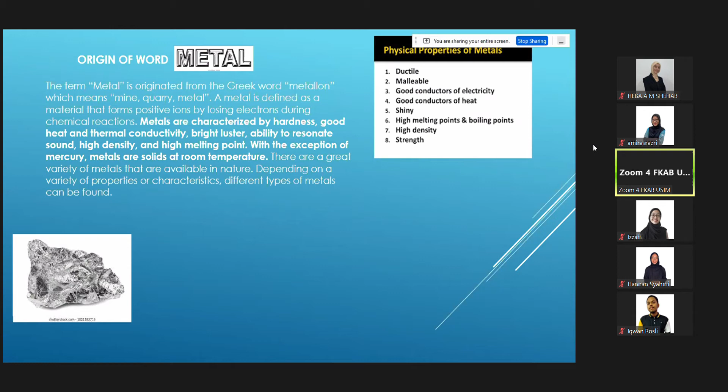Strength depends on the nature of the steel. If it is low carbon, the mild steel we used to use, it is very strong. Medium carbon steel is even stronger, and high carbon steel is the strongest. I'll show you some examples later of what low carbon, medium carbon, and high carbon steel mean.

Of course, it's the product of going through a process of heating and through the furnace, and they come up with so many products that can be used in our building industry.

You can build a simple structure like this using the universal beam and column, as they call it. I'll explain later what is meant by universal beam and column. We can turn this into a simple building built of metal, and it's very fast construction, with all the advantages over concrete.

All right, okay, let's see a bit of history. I mentioned history, maybe it's a bit too far back. Mesolithic, basically during the Stone Age.

Hunting and gathering communities moved across land near the British Isles, forming stone tools. Small trimmed blades, or microliths, were mounted in different combinations to make a variety of tools. Basically in the early days of the Stone Age, they used stone to make it sharp so it could become a tool for cutting.

6000 BC, gold was also found during the Stone Age. Men learned to fashion it into gold jewelry, like all these Egyptian kings.

The popularity of gold is largely due to its scarcity, value, and mankind's fascination with the metal. See the face of Tutankhamen here, all built of gold.

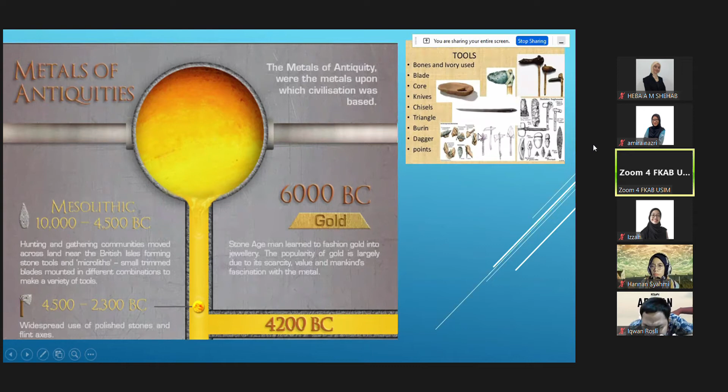For gold, it was first found in gold nuggets, like what you see below, discovered around 6000 BC. People first used gold for money and often traded it with others. So gold was appreciated a long time ago, even mentioned in the Quran as I told you.

And then in 4000 BC, silver. Silver, basically like a silver spoon, is hard, but it was widely used throughout history as a basis for monetary systems. They used it as money, as coins, and it played a central role in the currency of the Roman and Chinese empires.

Then at 3500 BC, you got copper. Copper is 4200 BC. Copper's use in antiquity is more significant than gold, as the first tools, implements and weapons were made from copper. These are raw materials, and we'll talk later about some alloy materials after.

You got lead. Lead also, we don't use so much in building, but we're talking about back 9,000 years ago - the oldest known artifact of lead is a statue found in the Temple of Osiris. This is something about history. The wheel is used in Central Europe. Wheel, lead, and the lead wheel.

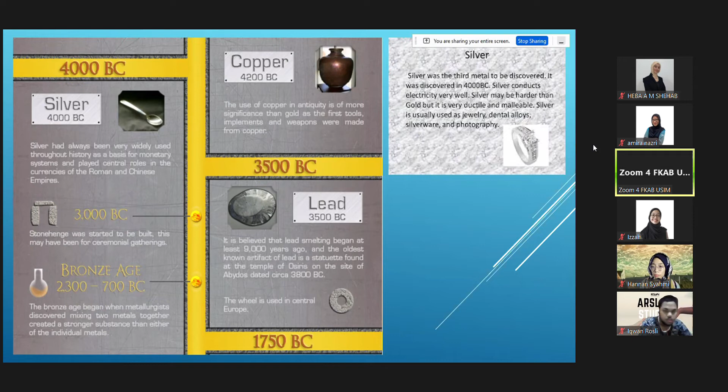Why was bronze important in ancient times? Bronze marked the first time humans started to work with metal. Bronze tools and weapons replaced earlier stone versions. Humans made many technological advances during the Bronze Age, including the first writing system and the invention of the wheel. It's a bit of history - I wasn't even taught about this kind of history. Maybe just for the sake of this class, I learned something here too.

So coming to 1500 BC, they got iron smelted. Before that, there's tin. Tin is found in 1750 BC, first smelted in combination with copper. Is tin an alloy too? No - bronze, brass, and lead are alloys. Tin is natural. Smelted with copper around 3500 BC, it produced bronze. Yes, bronze is an alloy, made of tin and copper.

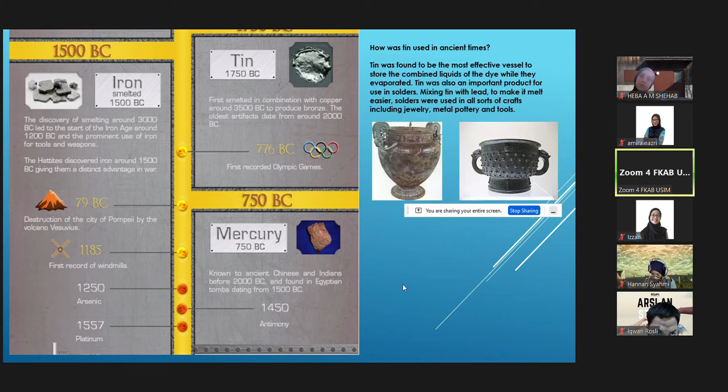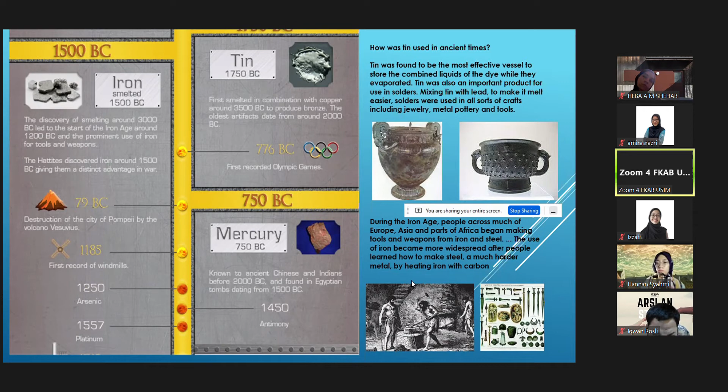During the Iron Age, people across much of Europe, Asia, and part of Africa began making tools and weapons from iron and steel. The use of iron became more widespread after people learned how to make steel, a much harder metal, by heating iron with carbon. That's the basic content of steel - basically iron and carbon.

And then come to 1700, the invention of the steam engine. They found cobalt, antimony, kinds of material I never heard of before because I'm not a metallurgist. Then they discovered metals in the 18th century, like bismuth.

Bismuth's main uses nowadays are pharmaceutical, atomic fire alarms and sprinkler systems, solders and other alloys, pigment or cosmetics, glass and ceramics, and also as a catalyst in rubber production. That is the form of bismuth.

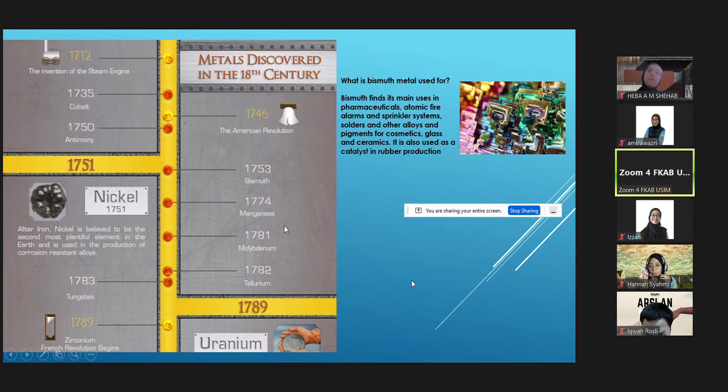Of course, manganese, molybdenum, titanium, all sorts of names. Tungsten is another material we use in our building industry, currently used as electrodes, heating elements, field emitters, and as a filament in light bulbs and cathode ray tubes.

Tungsten is also commonly used in heavy metal alloys such as high speed steel. Actually, high carbon steel is the same meaning. High carbon means very tough, very hard, used as drilling tools or similar things. We'll show you after that.

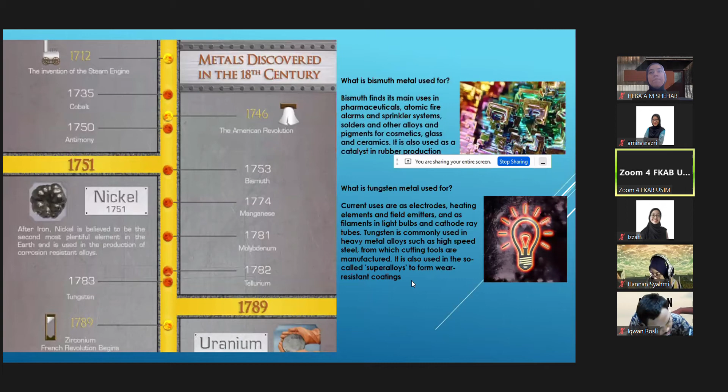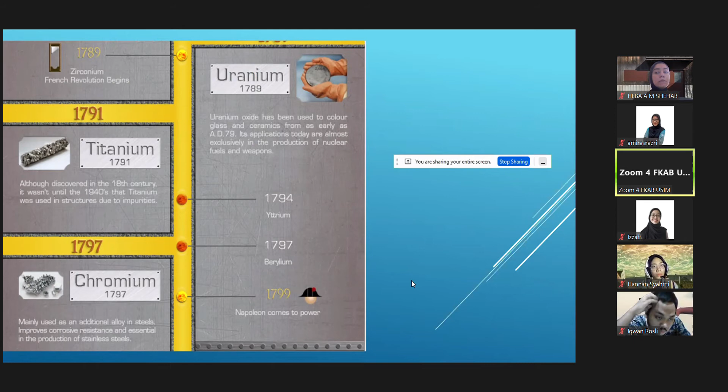Titanium, yes, titanium was found in 1791. They discovered titanium also in the 18th century. It wasn't until 1940 that titanium was used in structures, due to impurity because of the density.

Titanium metal is very durable for engineering applications because this metal is corrosion resistant, like stainless steel. Also, this metal is very strong, very light - it is 40% lighter than steel, but has the strength of high strength steel.

So titanium finds application in things like aerospace and building facades. Even nowadays in Europe and the US, they're using this as building facade, together with aluminium and stainless steel for building facade. Most aerospace parts are also using titanium.

I remember one of my architect heroes when I was doing my MPhil program in Sheffield - Ian Ritchie. He is very modernist, yet he loved arts. He looked for high technology. He said when he went to see an aerospace show, he didn't look at the plane flying, but at the detail of titanium being fixed to the plane. Even the titanium from the tire - the parts of titanium - it goes up to the building. So he had to see this kind of thing. Ian Ritchie.

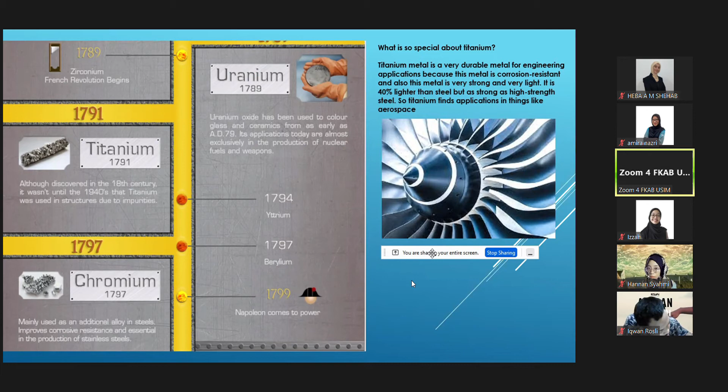Then you've got titanium. This is another building facade, by Frank Gehry - I think this is the Disney Museum. Even the Guggenheim Museum in Bilbao also uses the same material. It's light and of course it lasts, and it's expensive, of course, very expensive.

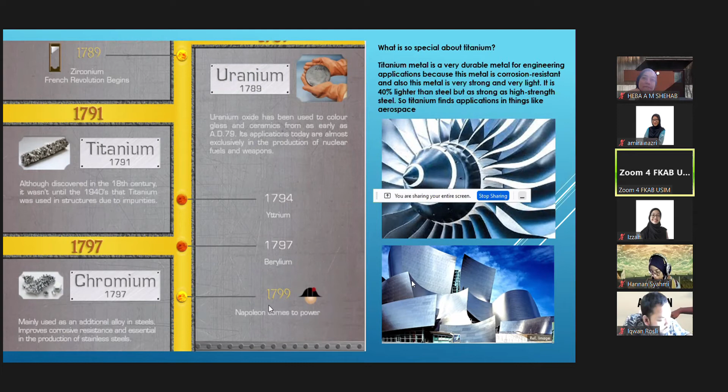And then we have silicon. Interesting, right? Silicon, the element, is a major constituent in ceramics and bricks. Being a semiconductor, the element is put into use for making transistors. Silicon is widely used in computer chips and solar cells - yes, it is a vital component of Portland cement.

Silicon is also used in the production of brick, production of fire brick. We never see this kind of thing here in Malaysia - I don't think so, we have this. Silicon is quite expensive. At the same time, silicon is famous for sealant, as a sealant, you know.

And this is what we call sealant. They even have structural silicon where they seal and join glass together, for a high glass panel, maybe 6 meters and above. They use this - they call it structural silicon. This is very, very strong.

Most of these wall panels, like aluminium composite panels and some stainless steel panels - sometimes for the external wall, they also use silicon to seal all the joints.

Aluminium at the same time is another very famous material for building construction, but not for structure, more for finishes. Even some structures like railings can be made from it. So is aluminum a metal? Yes. Aluminum is a silvery white, lightweight metal. It's soft and malleable, soft and can be shaped. Aluminum is used in a huge variety of products, including cans, foils, kitchen utensils, window frames, aeroplane parts, and so on.

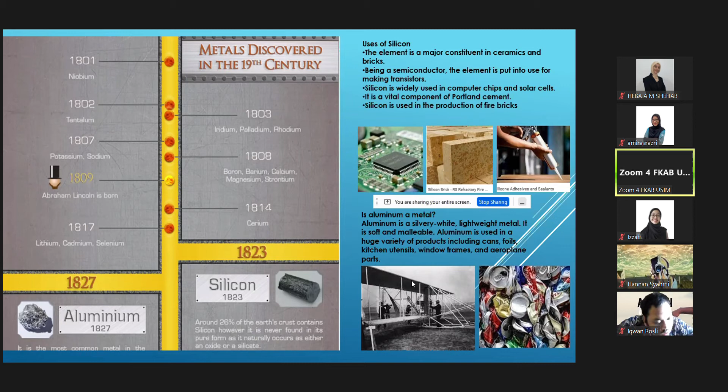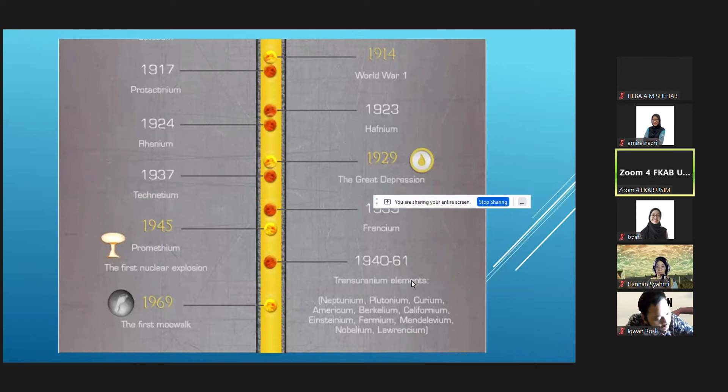Okay, now let's go into the real understanding of metals. Basically, there are two main groups of metal, you can categorize into two main groups. One they call ferrous, the other non-ferrous. I'll tell you what you mean by ferrous and non-ferrous afterward. Ferrous is all metal that consists of iron. They got split into two: pure ferrous metal like iron, that's pure, and then ferrous alloy.

That is steel, which is combined with carbon, cast iron, stainless steel. High-speed steel is the same as steel, it's one of the categories of steel. That is high-carbon steel. Then for the...

non-ferrous, that is without iron metal. Without iron, it's not magnetic. If it is ferrous, I mean that you can respond to magnetic pull. Non-ferrous is without magnetic pull. Basically, they have pure non-ferrous metal and then non-ferrous alloy. Alloy basically is a mixture of two chemicals, two metals.

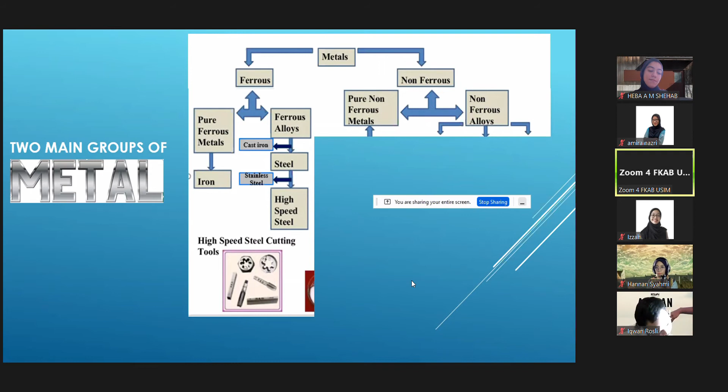Okay, what is under the pure non-ferrous? Basically copper, aluminium, zinc, tin, lead, silver, gold, and mercury. Mercury is actually liquid at room temperature, but it is considered and categorized as a metal. And then the alloy basically is brass. Brass is basically a combination alloy of copper and zinc. Then got bronze, which is a combination of copper and tin, and then solder.

Solder is for joining, for jointing two materials together. It's an alloy of lead and tin. Okay, based on this, we'll go through each of this one, to see how they were formed, and then what are the uses of this material.

Okay, ferrous metal. What do you mean by ferrous metal? Ferrous metals are metals that consist mostly of iron, and a small amount of other element. Ferrous metals are prone to rusting if exposed to moisture. That's one thing. What is the disadvantage of ferrous metal? Like my steel, all the steel are rusty, unless you put some coating, some treatment.

Ferrous metal can also be picked up by magnet, they are attracted by magnet. The rusting and magnetic properties in ferrous metal are both due to the iron, because the iron content is very high, so that causes the corrosion. Typical ferrous metal include mild steel, cast iron, steel, high carbon, high speed, high carbon stainless steel. You can see the rust condition, that's all. This is the characteristic of being attracted by magnetic. Ferrous, non-ferrous is without the attraction of magnetic. Just simple as that.

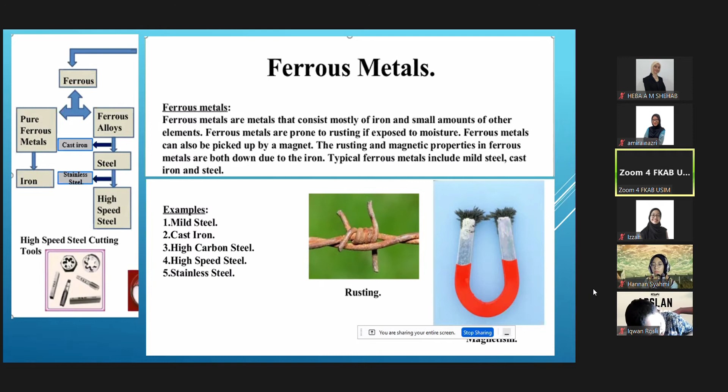Ductile, as mentioned, it can be expanded into wires, and malleable, it can be shaped by hammering.

Okay, where is iron most commonly found? Iron is the most abundant element by mass in the Earth's crust. Then the core of the Earth is thought to be largely composed of iron with nickel and sulfur. The most common iron-containing ore is hematite, but iron is found widely distributed in other materials such as magnetite and also taconite.

Where is iron found? Iron is found everywhere. It's one of the most common metals in the Earth's crust, found almost everywhere, combined with many other elements in the form of ore. Maybe you can try to dig behind your house and find iron, but depending on the nature of the earth, you might have to go in maybe 100 meters.

Let's see what cast iron is. Cast iron is basically a very strong metal when in compression, but it's very brittle - brittle means it can break, rapuh. It consists of about 96% iron and 4% carbon plus other elements.

Cast iron is used, if we look at some of these images, for car brakes, disc car cylinders, metal vices, manhole covers, and machinery bases like drill pillars.

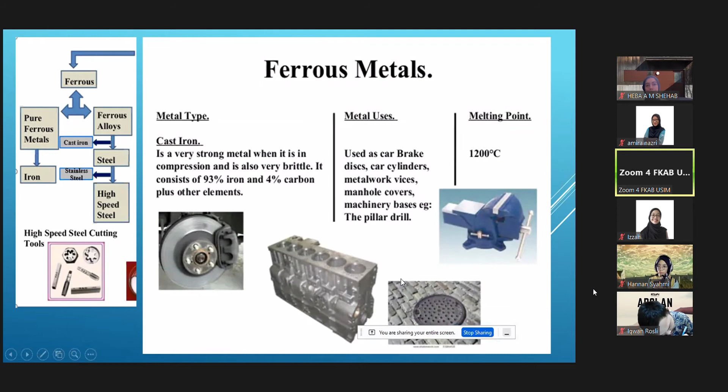For manhole covers, why do they need such a strong material? Because cars, lorries, or very heavy vehicles pass over these manhole covers sometimes, so they have to be very strong. So basically this is cast iron.

What do you use for building then? Cast iron is not good for structural material because of its brittle properties. So it's cast probably for facade treatment, decorative elements. It's not good for handling tension and bending moment because of brittleness and relatively low tensile strength.

Compared to steel and wrought iron, it has a coarse crystalline structure. The melting point is very low, so that's its weak strength. So it is only used for casting purposes, cast as a decorative purpose.

It's also used in architectural drawing, especially in Europe. There are a lot of cast iron elements on the facade of buildings. Even for services purposes, for pipes, it can still be used.

And for gates and fencing, decorative gates and fencing, this is mostly found in Europe, but we still have some cast iron gates here. If you go to somewhere like Istana, or come to Shah Alam Mosque, I think the gate and fencing there is made of cast iron.

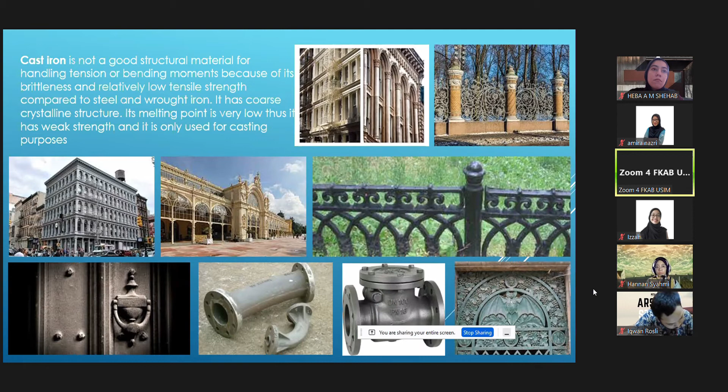A student asks: does casting mean like a facade finish? Cast here means the raw material is in liquid form - they cast it into a form, a decorative mold, and let it dry and harden. But it's not structural, it's just fixed on. Like casting concrete - you have a formwork with reinforcement, you pour concrete, then remove the formwork and it becomes a beam or column. Something like that, but this time it's cast in a loose form so it can be fixed anywhere on the building as treatment to the facade.

But in modern days, modern architecture doesn't have this anymore. For classical architecture, Baroque, Renaissance, you can see a lot of this kind of element on the facade of churches and so on. Okay, now steel.

Our main focus for this subject this semester is steel. Just to give an overview of related materials. I mentioned earlier that steel has been categorized into three types: low carbon steel, medium carbon steel, and high carbon steel. What do I mean by this? Because steel is a combination of iron and carbon.

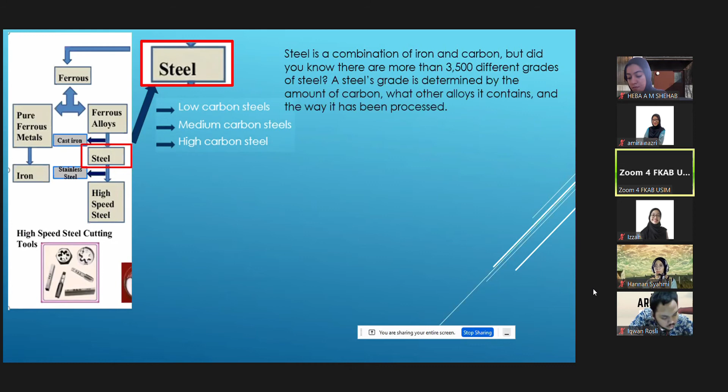Did you know there are more than 3,500 different grades of steel? Steel grade is determined by the amount of carbon, what alloy is contained, and the way it's been processed. The more carbon it has, the harder it becomes, but then it becomes less ductile and maybe can be brittle too.

I put forward this table to show you the content of carbon included in iron, so that it becomes a different kind of character and property. Basically, mild steel with percentage from 0.05 to 0.3 is low carbon steel. These are low carbon steel, or mild steel, the first category.

The second category, medium carbon steel, is basically from 0.25 until 0.5. For mild steel, let's look at its uses. The lower the carbon, the lower the strength, like sheet, strip for press work, car bodies, tin plate, wire, rod, tubing, and also wire, rod, nail, screw, concrete reinforcement bar for slightly higher carbon content.

For a bit higher percentage of carbon, you get case carburising, then steel plate for the highest one. This is the one we use a lot - steel plate, sections for structural works. This is 0.1 to 0.3 carbon, called low carbon steel. This is the most common material used in the building industry.

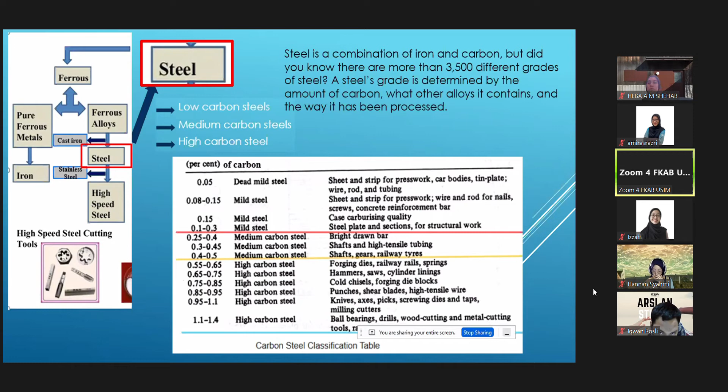Then high carbon steel - basically it has a lot of carbon, but it's very tough and very hard. So it becomes forging dies, railway rails, spring, hammer, saw, cylinder lining, cold chisel, forging die block, punches, shear blade, high tensile wire, ball bearing, drill, cutting tools - all these tools are made of this category, high carbon steel.

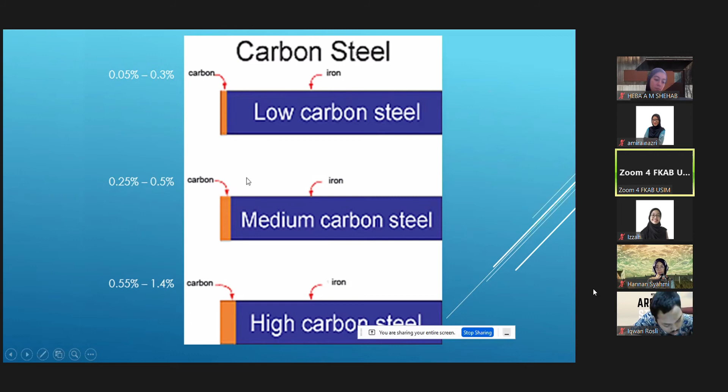Basically it can be summarized that within 0.05 to 0.3 is called low carbon steel - this is the amount of carbon shown in orange color, and the iron is shown in blue. As it increases it becomes medium carbon steel, then high carbon steel, the highest one.

Mild steel is ductile and malleable - it can be extracted into wires without changing the strength of the material, and can be formed from solid into sheet metal. Mild steel will rust quickly, especially if it is in frequent contact with water or moisture - if you don't coat or protect the surface, it will definitely rust very quickly. It's used for studs, bolts, building girders - girders meaning beams, called girders in America and beams in Malaysia - and also car bodies, gates, etc.

Melting point is 1,600 Celsius - once you hit this point it can melt. This is where scrap metal collected from recycling centers is burned in a furnace at more than 1,600 degrees until it becomes liquid, then it can be formed into whatever finished materials are needed. That's mild steel, low carbon steel.

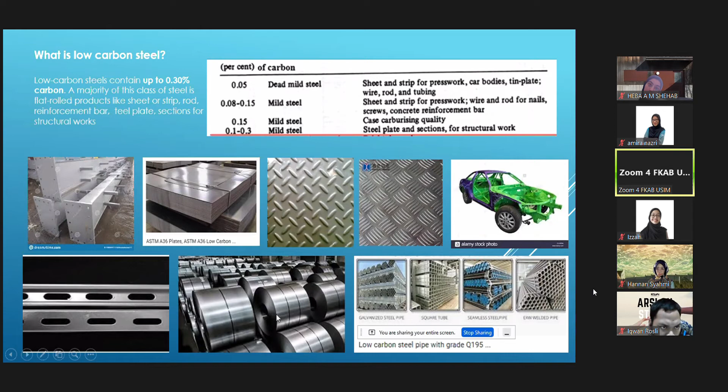For low carbon steel, here are some other examples of its uses. The first photo here may look like a column. As a sheet, this shows malleability, meaning it can be turned into sheet form. As checkered plate, this is used for floor and sometimes for wall, to avoid slipperiness by creating texture and pattern. It can also be used as a car frame, and comes in rolls and tubing as well.

Its properties like ductility, weldability, and malleability make mild steel an ideal construction material for steel buildings and bridges. Moreover, mild steel complies with stringent seismic and wind requirements, and it's also fireproof. Fireproof isn't so much about direct fire resistance, but about meeting seismic and wind requirements.

I did a project in Indonesia, an apartment complex of 2 blocks in Salemba, Jakarta. For 3 years we traveled up and down every 2 weeks to Jakarta. We used a lot of steel there, and they used what's called shear wall construction, which takes up the seismic load. Seismic means earthquake, and also the wind load.

This is some of the material used as a building material. Frame structure for the roof and the structure for the building is the beam or the girders. They can join in many ways — we'll talk about jointing when we come to that subject later. This is a kind of reinforcement they use before pouring the concrete. We do all the checking, everything is okay, and then the engineer gives the green light to pour the concrete.

This is some of the materials used in a very creative way, like bridges. It can stand a long span structure, like the Sydney Bridge, and a lot of bridges in Europe and the US. In early days, bridges were used not just for pedestrians, cars, and vehicles, but also for trains, as railway bridges.

This is some expression of how mild steel can be used to create emotion and movement in form. A bridge with some kind of flying feathers or whatever, supported by cables. There are cables supporting the bridge, and then another passage there.

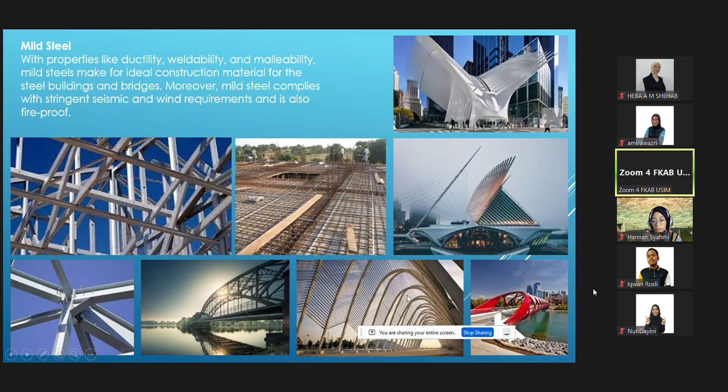We also have another creative use of steel, properly coated and protected so it won't rust. Maybe the top one here is not mild steel — basically the main one is a concrete frame. I'm not very sure about the last one, but the one below here is by the same architect. This one is mild steel.

Now, what is medium carbon steel? Basically it contains carbon, and manganese from 0.6 to 1.65 percent. This steel is mainly used for making shafts, axles, gears, crankshafts, couplings, and forgings — basically for mechanical purposes, engines, and so on.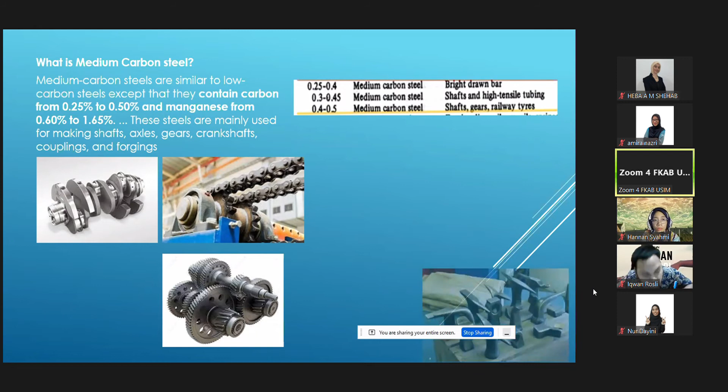This is used for forging equipment, maybe tubing, medical services or whatnot. Railway tires use this kind of steel too — it's very hard. And this chain is used for various purposes.

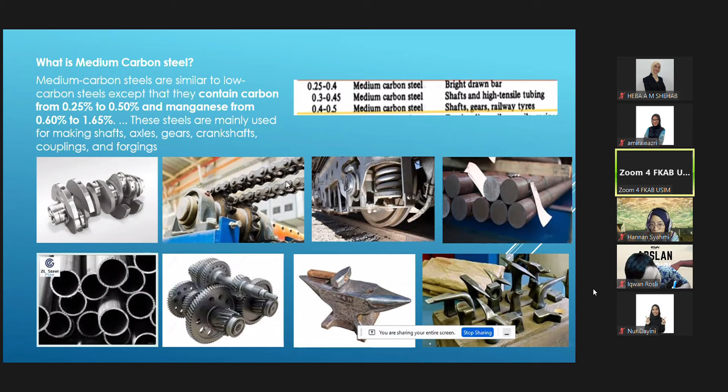Now, high carbon steel — a ferrous metal. High carbon is basically high speed steel. It is a very strong, very hard steel with high resistance to abrasion. Abrasion means 'geseran' — two metals rubbing together. With up to 1.5% carbon content, it's very tough, used for hand tools like screwdrivers, hammers, chisels, saws, springs, and garden tools.

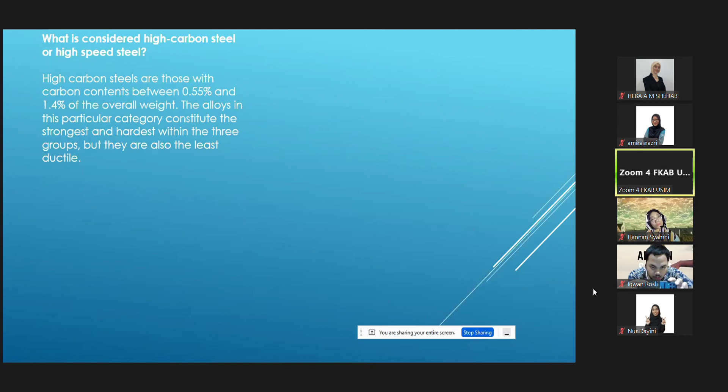So what is considered high carbon or high speed steel? High carbon steels are those with carbon content, as mentioned, from 0.55 to 1.4%. Among the three categories by weight, this alloy is the strongest and hardest, but also the least ductile — meaning it cannot be expanded into wires. It's too hard, cannot be bent, and that kind of thing.

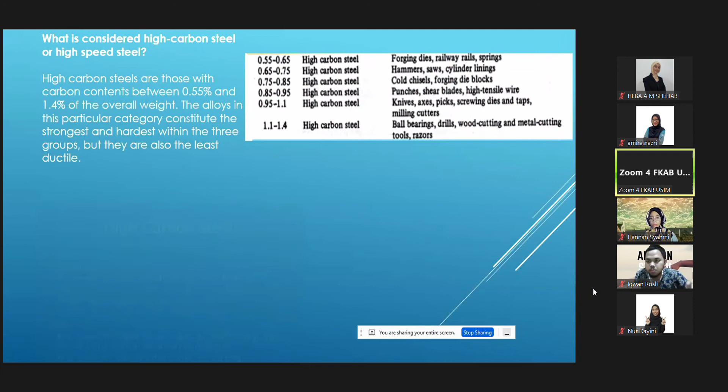These are the kinds of uses we've gone through, especially for tools. So what are the properties of high carbon steel? Basically the granular structure, like grains combined together, makes it very tough — more tough and elastic than mild steel, but more difficult to weld, so we don't use it in building construction as a structural member. It can be magnetized permanently and can withstand shock and vibration.

Its uses are basically for making parts of machinery that need hard, tough, and durable material, such as tools for drilling. This kind of machinery below is basically made of high carbon steel. Even railway rails, ball bearings, and chisels have to be tougher than other metals to be effective — like drill bits, which have to be tougher than the metal they drill through.

I remember when we were doing the SDME Dubai project, I went to see a factory fabricating metal parts. They used a big drill machine that creates big holes, about 1 inch in diameter, through members about 10mm to 12mm thick — so it's very heavy.

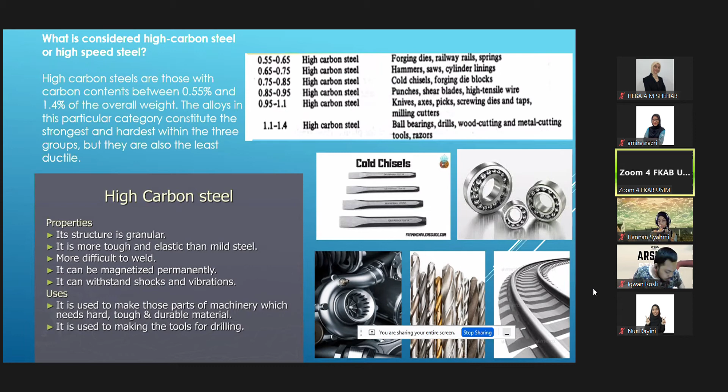The next one is stainless steel. Naturally, you see stainless steel all around you, especially in the kitchen area, from basins to medical equipment, forks and spoons, anything that needs to be easily cleaned and not rust. That is the best thing about stainless steel: kitchen sink, cutlery, teapot, cookware, surgical instruments, and whatnot. This is very common for daily use.

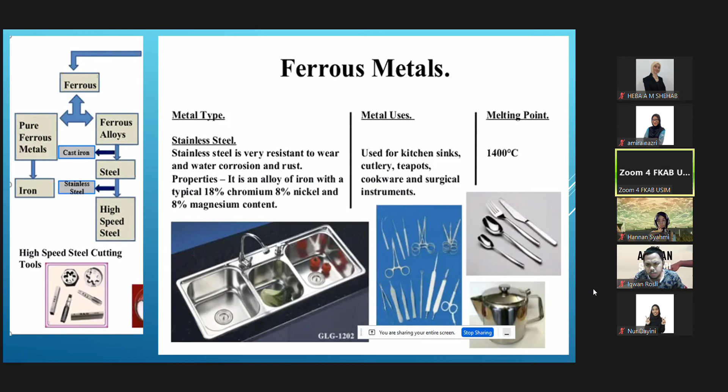But what about for the building? The best thing about stainless steel is that it's corrosion resistant. Chromium is part of the alloy element in stainless steel that gives it corrosion resistance. They combine it with chromium, about 18%. It also has fire and heat resistance, especially high chromium and nickel alloy grades, which resist scaling and retain high strength at high temperature. So it's not so much for structure, but more for...

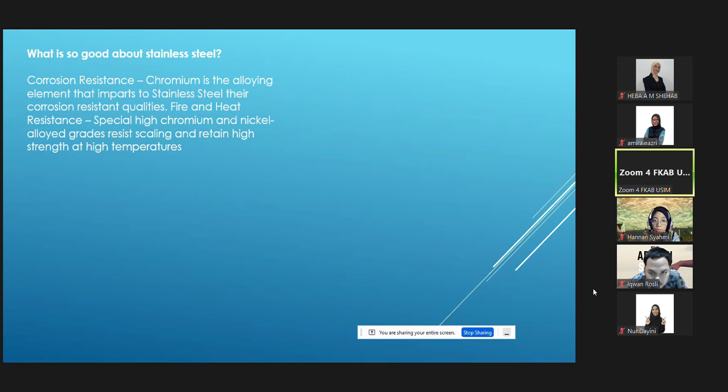maintenance-free material for building purposes. Stainless steel is a durable, affordable metal used for a wide variety of purposes. It's strong, making it perfect for construction, and corrosion resistant, so it can last a long time without being replaced or breaking.

Let's see some of the most popular uses of stainless steel in construction: architectural cladding, like the aluminum cladding, what they call aluminum composite panel. Handrails are quite common, along with drainage and water systems, wall support products, jointing, screws, frames, and roofing structure. But we seldom use it for structure itself—facing and detail fittings more so.

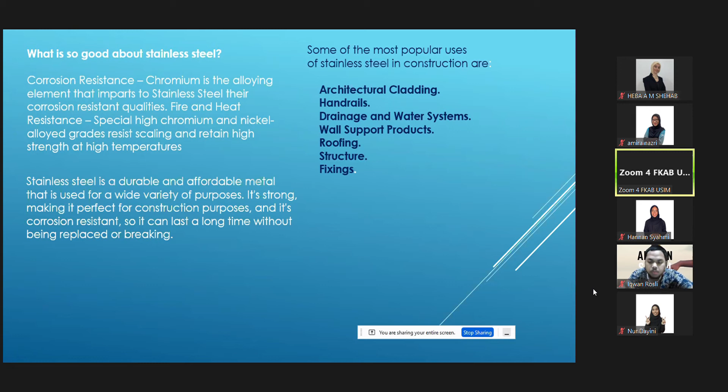We use stainless steel commonly, especially in heavy traffic areas around the lift core and lift lobby, where people touch and scrape the wall all the time, so it needs to withstand that. That's why even in the lift lobby and lift car itself, most of the finishes are made of stainless steel, and even some aluminum.

Railing is very common in stainless steel. It's non-structural, just fixed to the floor, used for safety balustrades and whatnot, complying with fire requirements and bylaws.

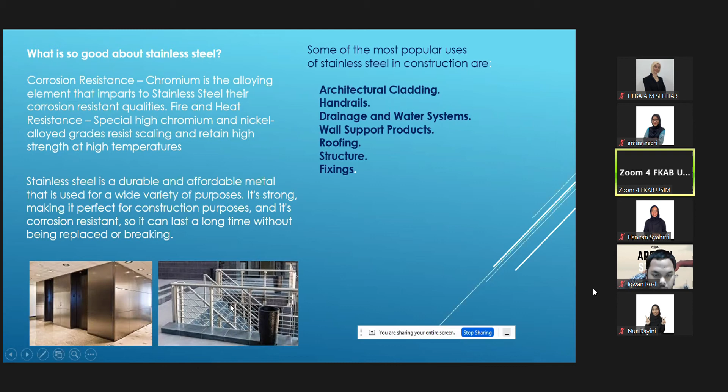One thing that makes stainless steel popular as an external finish is found in our Petronas Twin Towers. The finishes, the skin, are all made of stainless steel. It's a very expensive material, but it glitters at night when it shines, and it's easily maintained.

They have a maintenance schedule that goes around, with a maintenance machine up there that moves from top to bottom, cleaning easily without much effort to scrape. Probably just washing is good enough. But of course, this is expensive.

Another building that uses stainless steel is OUB Bank in Jalan Raja Laut—they use it for the frame. All the frame is stainless steel, not aluminum, not mild steel. Again, it's about free maintenance, or at least less maintenance.

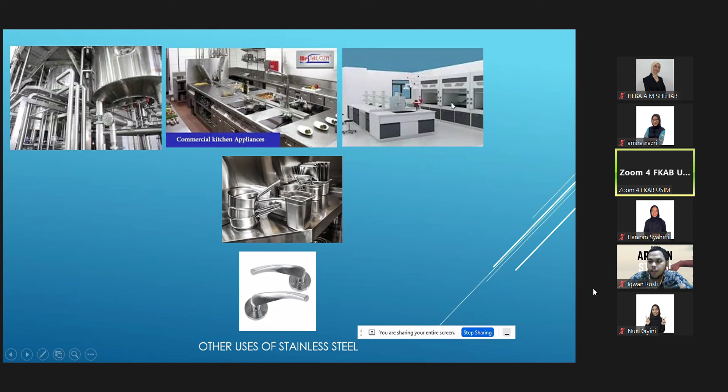For other uses of stainless steel: heavy equipment that needs cleanliness, commercial kitchen equipment in hotels, restaurants, big banquet halls, labs, and gates—hinges mostly made of stainless steel and brass, trolleys, handles, and fittings like stainless pipe fittings, flanges, joints, and other parts.

Tubing too—now you can see stainless steel water tanks protruding on rooftops. This was a common sight when I went to Korea once, back in 1988. We didn't see this in Malaysia back then, but now we see a lot of it here.

Externally, because it's very hot under the sun, the heat alone can give good hot water for a day, like a boiler. Even our normal poly tank, made of rubber, under intense heat like 32-33 degrees Celsius, has very hot water inside. Not to mention a stainless steel water tank—it's probably too hot for you to even take a bath.

Even some element of steel being used as a gutter, part of the house, for the piping or not. Okay, next one is...

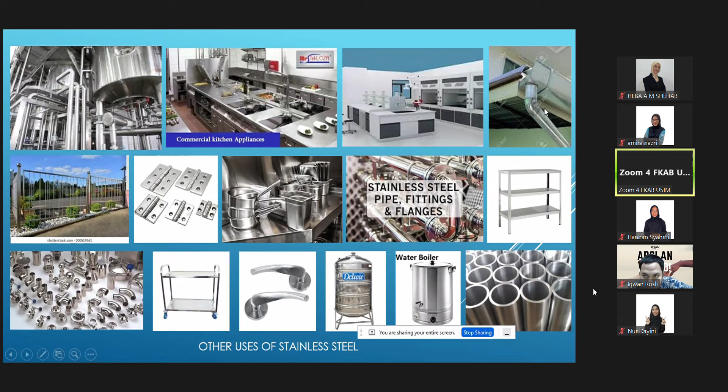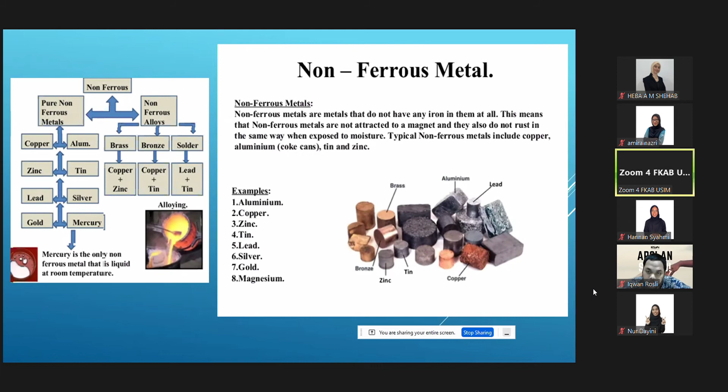Basically, this is in the raw form. Sometimes it's not so much raw form, some being shaped already into the form. You can differentiate by the colors and texture of the material.

Let's see aluminium. Aluminium is another very common material used in building construction, similar to stainless steel, but it's less tough and less strength than stainless steel. It has a similar character, like it's not rusty, it can be shined, washed easily, exposed to outside weather. It tends to be light in color, and although it can be polished to a mirror-like appearance, it's very light in weight. That's why aluminium is used. Now aluminium is very commonly used in door and window frames.

Door and window frames, even high-rise towers use what they call curtain wall. Curtain wall is basically a wall that rises from the bottom floor up to the top floor, like a curtain, with no break. So a lot of this uses aluminum frame, and also sometimes stainless steel. The cost is cheaper than stainless steel.

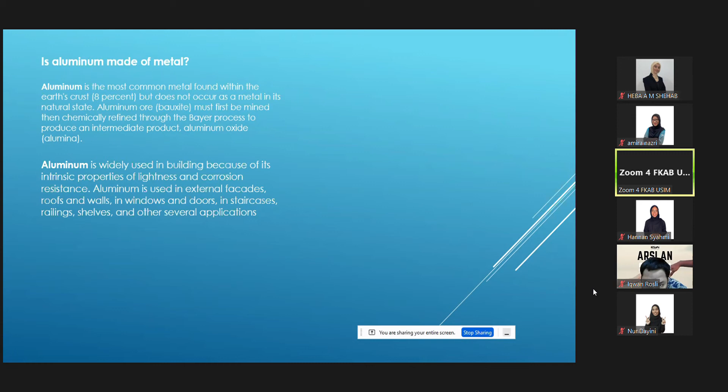It's widely used in building because of its intrinsic properties - the good qualities of lightness and corrosion resistance. Aluminium is used in external facade, roof, walls, windows, doors, staircases, railing, shelf, and other applications. Again, it has similar character to stainless steel, except that stainless steel is more expensive.

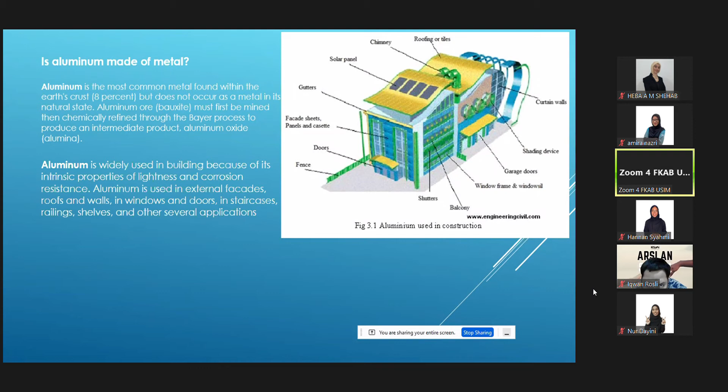Sometimes they use galvanized iron. That means they galvanize the iron with zinc - coated with zinc by an electrified process. You can use that as fencing.

Facade sheet, panel, cassette, gutters - all this can be used in a building, as far as aluminum as a building material is concerned.

This became very popular since the 80s, I think into the 90s. At first it was a bit expensive. Now things are competitive because last time there was only one supplier, they called it Alucobond. But now we've got many suppliers of aluminum composite panel, so the price has dropped quite substantially. Before it was quite expensive - this is very high class, expensive building, corporate buildings, maybe they use aluminum composite panel.

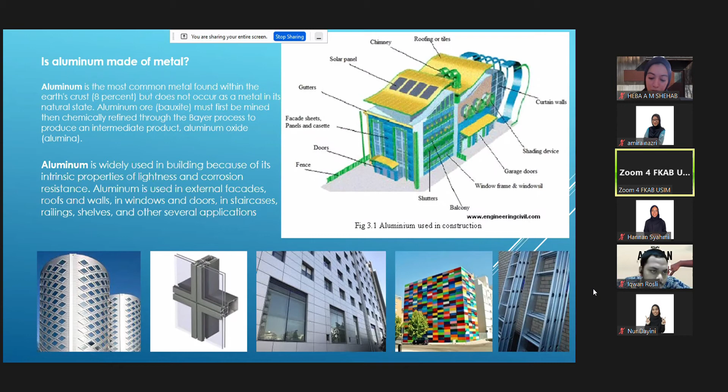And then copper. Copper is one of the materials that looks very expensive. It's a nice looking kind of color to me because it's quite attracting in terms of color. Ductile, malleable metal, can be shaped. Often red or brown in color - normally bright brown in color. Very good conductor of heat and electricity.

That's why copper in the building industry is basically used for wiring purposes. This reminds me of a project I got before - this project is Pasar Keramat, now they call it Keramat Mall. The project was really a market.

The market had so much problems - they called it Pasar Keramat, also 'Keramat was lambat siap' - it took about 12 years to complete. I was on the job for 12 years, and we changed through many contractors. At one point when there was no contractor, one was terminated, the waiting time was about 1 year before they appointed a new contractor, before we did new contract documentation.

The building was quite a big building. It was guarded by a security company, and nobody knew what happened inside during the time when there was no activity. But apparently for 1 year, I think the guard or security officer must have been working together with thieves - cable thieves or burglars, whatever they call it, thieves.

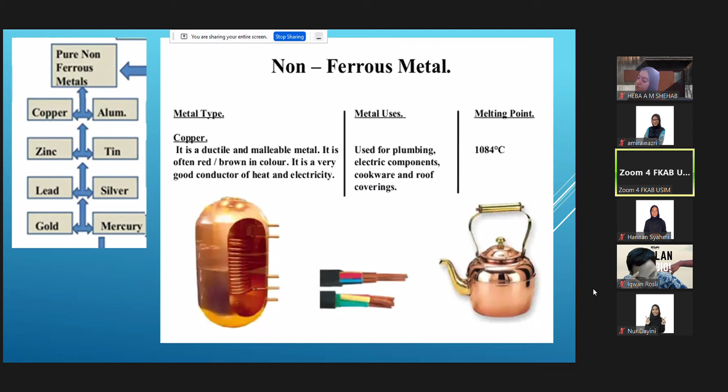Okay, anyway, coming back to copper - it's a chemical element, reddish, ductile, called group 11. If you search Wikipedia, they give you this kind of information on the periodic table, that it's usually a good conductor for electricity and heat. Copper is found in a free metallic state in nature, so it's solid copper, unlike bauxite which needs extraction.

What is made of copper? It's commonly used to produce a wide variety of products including electrical wire, cooking pots, pans, pipes, tubes, automobile radiators, and many others. Copper is also used as a pigment and preservative for paper, paint, textile, and wood. So a lot of things can be made from it.

This is the natural color of copper - very bright, reddish brown. They even used it for our 1 cent coin, which was made of copper, but now it's no longer used.

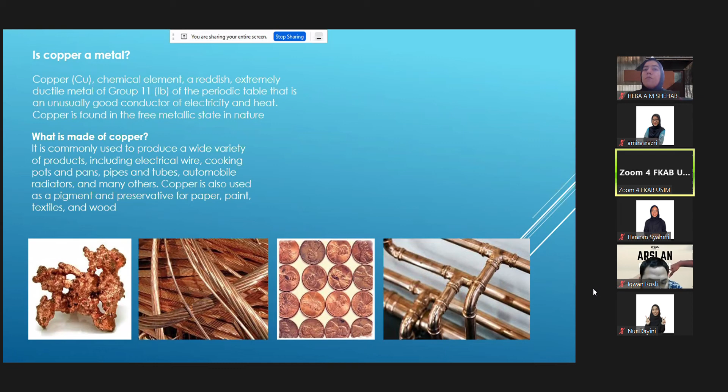For piping, aircon piping - refrigerant piping, they call it - from your cooling tower, all external units of your aircon into the internal unit, your aircon diffuser, all use copper pipe. Even hot water supply in hotels uses copper pipe. If it's a hotel like 30 stories, imagine all the toilets having hot water, you'll be using copper pipe. A bit expensive, but it's the best.

Copper has also been used as a finish for buildings, but of course it's expensive and very rare - I don't think we can do it here in Malaysia. But the color it gives is sometimes bright, a bit like luxury, not like gold, but luxurious in that sense. It gives a nice texture to the building and an elegant look by using this copper color.

But in Malaysia, there's one building that has a copper dome. Anybody can tell me what kind of building that is? It's in KL, a very brightly colored metal dome, like a mini dome. I'll give you a clue - it is in KL. Sultan Abdul Samad building? Yes, you're right, Sultan Abdul Samad building. That is the copper dome, on top of the clock tower and the staircase tower.

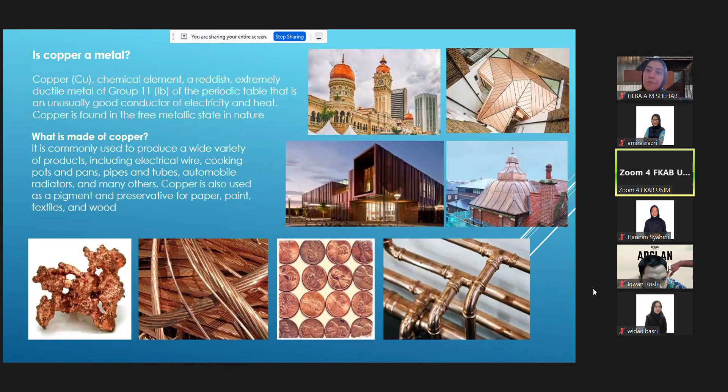So this copper dome was actually donated, I think, by an Australian company, if I'm not mistaken, when they replaced it during renovation of the building. So you can see the brightness of the color - you don't have to maintain it.

Okay, what is zinc? This is another non-ferrous metal, zinc. When we talk about zinc, we always remember the zinc roofs back in kampong. Those who come from kampong areas - maybe now it's not that common, now there's a lot of metal roofing. During my years back in the 50s, of course we used atap roof first - atap roof is nipah roof, which we could buy easily from kampong folks.

But when the economy of the community was slightly better, maybe with a bit more money, then they used zinc. But zinc roof is very hot. Of course, it's not resistant to corrosion - it's mentioned as resistant to corrosion from moisture, however zinc is a very weak metal and used mainly for coating steel.

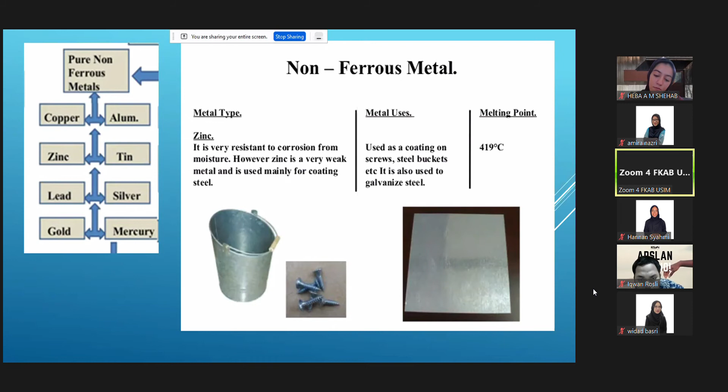It's used for screws and some, used for buckets etc, but it's more like a material. For a house, basically, back in your kampung, they use this so-called zinc roof for the house.

If you remember this kind of roof, over the years it rusts. Even in Kuala Lumpur at one time, you'd see all the shop houses along the jalan area around Petaling Street, around Central Market - all shop houses, mostly the roof made of zinc. So you can see very dark and unsightly views from the top. Once you have a building higher than these shop houses, the views become quite unsightly - looking down at these lower shop houses with their zinc roofs, they are all rusting.

So this is the natural, the first kind of zinc that looks very bright, shiny, but it's very hot. One thing about zinc, it gains heat very fast, but it gets cold very fast too. Once the sun is off, there's no more heat, so it doesn't retain the heat in the material.

Like some materials, it does retain. Even for a brick wall, if your brick wall is facing west sun, and your room is covered with a concrete slab, the heat gain from the wall and slab is so huge that even at night at 12 o'clock, you can still feel the heat coming from the roof and the wall.

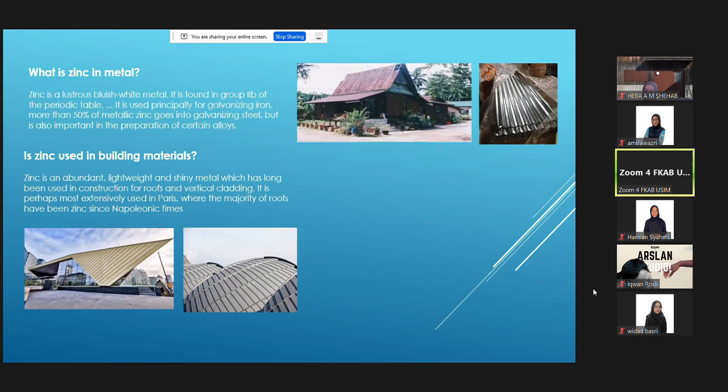So these are some examples of zinc roofs being used. Now they have probably modified some other alloys to make the zinc rust less and more malleable, so it can be constructed easily. These are some examples, and this building is basically coated with galvanized iron sheet, which uses zinc as the basis for the galvanized iron sheet.

So far, any questions? Anybody? Do you understand?

Yes, faham? If you don't understand, just stop me.

I'm giving you an overview, but we're not going into detail on this. We just give you an overview of the kind of metals, so you know what is copper, what is silver, what materials are used for building construction, facade treatment, utensils. At least you know something there. But if you design your building and put a zinc roof, be careful, because in Malaysia zinc roofs are seldom used. Aluminium panel, composite panel roofing is okay. Titanium, yes, but only for very expensive buildings. Basically we just call it metal roofing, and of course metal roofing again has a lot of categories. We will discuss that later.

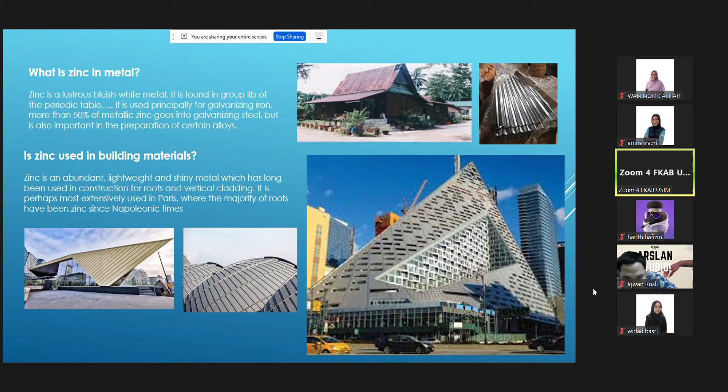Don't select something that is not commonly used in Malaysia. Some assessors, in a portfolio review, may not even be exposed to this kind of material, and they may say you must be crazy using this. Try to get something common. But if you find something interesting like titanium, you can give the reason why you see titanium as the best material. Like the facade we saw just now, they wanted to create something not shiny, with some texture, some rough texture on the facade. That can be done with that kind of material. It depends on your design intention.

Okay, yes. Anybody want to add something?

Tak dengar lah, sorry, I can't hear you. It's very like bergema, like echo. Maybe you have to move closer to your speaker or microphone. I'll connect my earphones. Okay, any question? You wanted to ask something? Yes, I want to ask something, but let me connect my earphones first for the sound quality. I can hear you, can anybody repeat the question? I can't hear you already, sorry, it's like an echo, not very clear. Okay, never mind, you can write it on the chat, we'll come back to that.

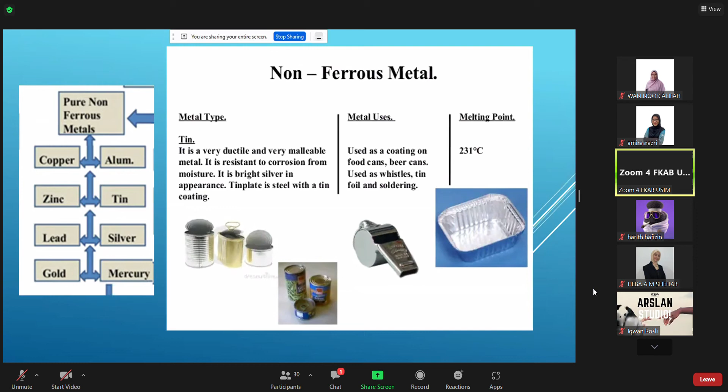So tin has a very low melting point. Tin is basically ductile, very malleable, soft, can be shaped, and resistant to corrosion from moisture. This is similar to stainless steel and aluminium, with a bright silver color appearance. Tin plate is steel with a tin coating, used for food cans, beer cans, and small vessel items. But for the building industry, I don't think we use that material.

So I want to show something about tin. At one time Malaysia was the main exporter of tin in the world. Back many years ago, I still remember the activity of tin mining, using something like the 'dulang' kind of pan. They pour water and shake the pan so the tin drops to the bottom and the soil is thrown out. You can see this everywhere, especially in Ipoh and Selangor, where there was a lot of tin mining. This is like traditional tin mining in Cheras and similar areas.

But you can still see this tin mining activity if you go to Tambun Timpak in Ipoh. This is a replay, reconnected and resurrected tin mining activity, at a certain time in Tambun Timpak, Ipoh. You can bring your brothers, sisters, or family for a weekend outing there - quite a good place.

And then this is a palong, a tin mining method. In Selangor, if you take a flight or use a drone, you can see a lot of pools - they are all ex-mining pools. At the moment there's one big project by Gamuda, I can't remember the name of the new housing scheme, the new township, near the Elite Highway that I used to pass by every day from my house in Shah Alam to Nilai. There's a combination of used mining pools that they turned into a township. They took advantage of the pools to create an exclusive housing area with the element of water, forest, and nature.

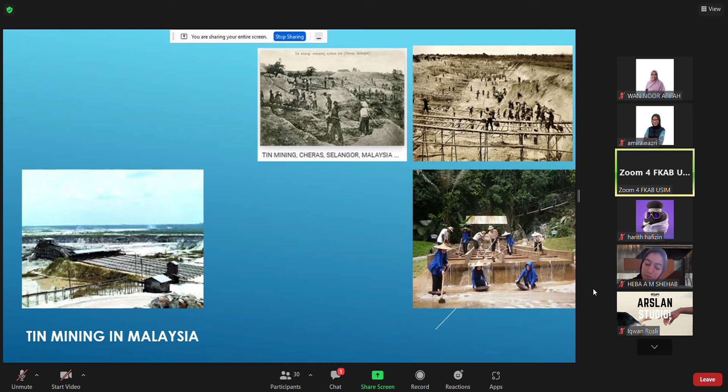So it is a very interesting kind of township. If you have time, you can go and see it. The fact is they retained the pools, and created housing and spaces in between the pools, including some nice landscaping. This is tin mining in Malaysia - there's a lot found in Ipoh and in Selangor. And then this is probably, I don't know whether you have seen this...

When I went back to my kampung in Penang, using the old road from KL to Rawang to Serendah to Tanjung Malim to Ipoh, you can see a few of these tin dredges. They call it tin dredge.

Tin dredge is like a ship where they lower down the dredge, scoop the earth, filter it with water, take out the tin, and throw back all the earth into the water. Tin dredge was a very common sight in the 60s.

Now I don't see any more in Selangor. I think there's one in Ipoh, Seri Iskandar, because my friend, an architect, is doing some kind of museum with the existing dredge. They're making it some kind of showroom for the township. They retain the so-called dredge and turn it into a museum, which is quite interesting.

Tin is one of those main common materials that was very valuable to Malaysia at the time. This open pit mine is also found in Malaysia. I didn't manage to get a photo of this.

If you know this area, Sungai Besi, anybody who passes by near the toll house, you can see on the left there's a new hotel called something Golden Horses, Palace of the Golden Horses, and a shopping complex, and then two very big pools there. So those pools originally were this open pit mine, something like that at the top.

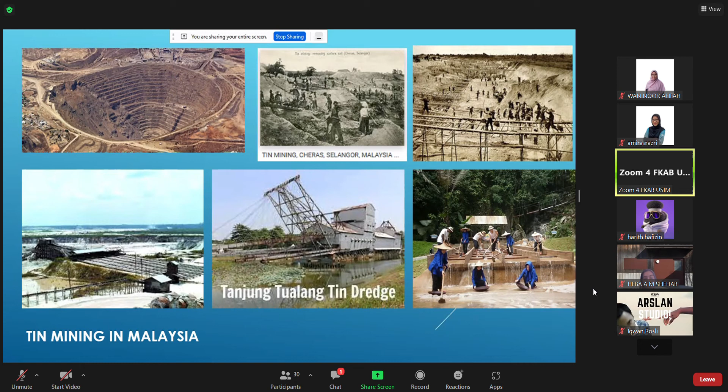Okay, I think we are coming to an end.

We have lead, another material. It's not much used in building material, but it's important for you to know. Basically it's a very soft, malleable metal that can be shaped. It's also counted as one of the heavy metals, something like mercury as well, heavy metal.

You can see it in car tires for balancing. Those who used to go to balance your tire, maybe you followed your dad to balance your tire - they attach a lead piece at the edge of the rim so that the tire is in balance, so it's not shaky. So they use that lead.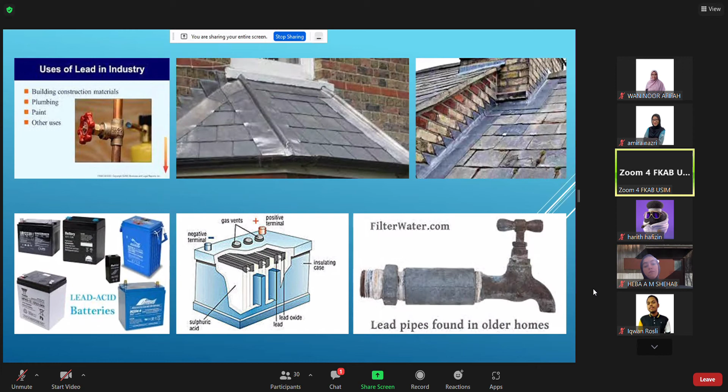And then silver. Silver also is not so much of use in building industry, much more for sometimes cutlery. What's mentioned here is used for trophies. Even mirrors are made of silver - the reflective surface of the mirror is made of silver. It's a soft, white, lustrous transition metal with the highest electrical conductivity of any element, very good for electrical conductivity, and the highest thermal conductivity of any metal. The metal occurs naturally in its pure free form.

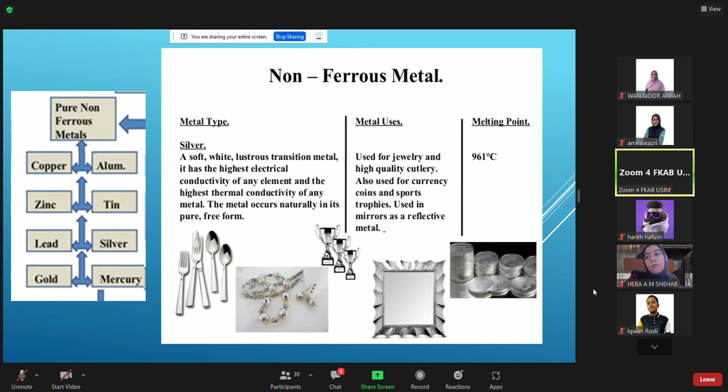And then the maintenance is about oxidizing in air or water. Gold resists attack by individual acids, so it doesn't get affected - if you throw any acid on it, it won't tarnish, discolor, crumble, or be affected by any solvent. This is why gold is important. It is very strong even if it's submerged in any acid. So how is gold seen in connection with building construction?

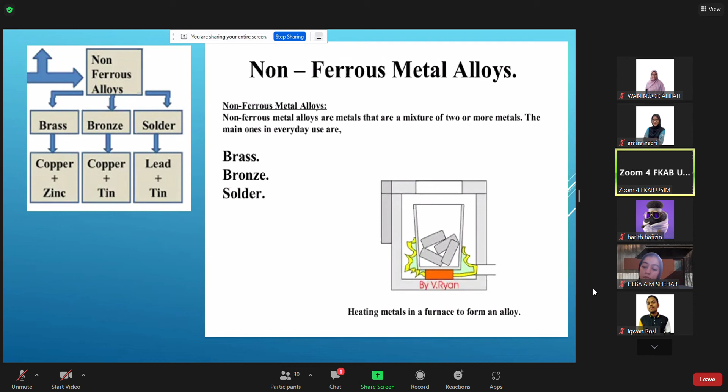So basically, we are now looking at the alloys. In the last few slides, alloys are a mixture of two materials. So what is brass? Brass is actually made of copper - this is a non-iron, non-ferrous alloy, no iron at all, no magnetic pole, and doesn't attach to any magnet. So brass is actually made of copper and zinc. Bronze is copper plus tin. Soldering is a jointing of two materials together, made of lead and tin. So non-ferrous alloys are metals that are a mixture of two or more metals. The main ones in everyday use are these three, and I think brass and bronze are used in building, and also solder.

So basically brass is a mixture of copper and zinc, and copper remains its main component - brass is usually classified as a copper alloy. The color of brass varies from dark reddish brown to light silvery yellow. Brass is stronger and harder than copper, but not as strong as steel.

It is easy to form into various shapes, a good conductor of heat, and generally resists corrosion from salt water. So if you want to retain your holiday house near the sea, you could probably use brass elements, coating the frame and the roof, maybe.

So if you see brass, we talk about a brass band - that's like a brass band. I think most of the instruments, this consumer probably made of brass. You can see some of these instruments. So it's used as water fitting, screws, radiators, musical instruments, cartridge casings, firearms - even firearms made of brass.

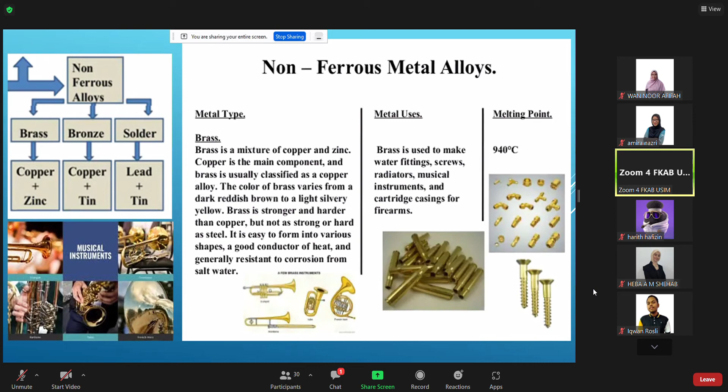Again, commonly used in applications where low friction is required, meaning not much vibration, such as locks, hinges, gears, bearings, ammunition casings, zippers. Your zippers, you can see the color is made of brass. Plumbing, hose couplings, valves, electrical plugs and sockets, also made of brass.

You can see some of the jointing of the pipe is brass. It looks a bit like gold, but not like gold - it's not as shiny as gold. This one is actually on ironmongery. A lot of expensive ironmongery is made of brass.

I remember choosing a lot. I was doing some project in Sana, Kelantan for the Rulers Conference Hall back in 1984. We were selecting all this collection from UK on brass products for the building. And of course, it's expensive.

Another thing about brass used in building - it basically becomes a separator, called a dividing strip. Eventually, if you use different materials, you can divide them with brass, a brass strip we call it. Sometimes you want to break the so-called construction joint.

I don't know whether you've come across this - I forgot the name. This is basically used where you want to reduce construction joint cracking. You put a brass strip to break the expansion joint.

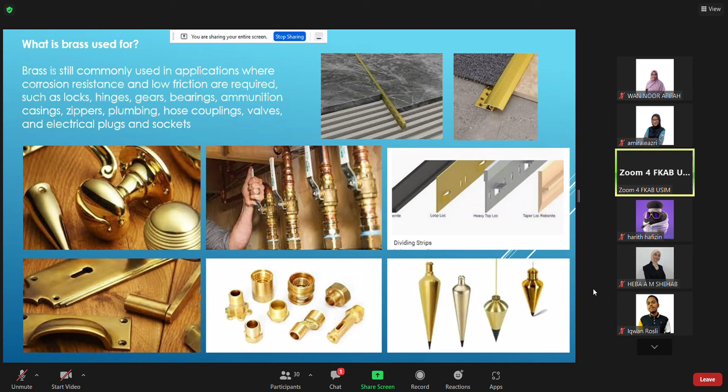So if you want to check whether the wall is straight or not, you just put this string on top and see whether the wall is straight or not. This is used in construction as equipment to assist in building straight walls.

Okay, and then bronze is basically an alloy of copper and tin, primarily copper with tin as the main additive. It's hard and brittle, can break, but has very high resistance to corrosion. This is why you can use it for ship propellers, because it's basically in contact with salt water - so that is probably the most practical material used for a ship propeller.

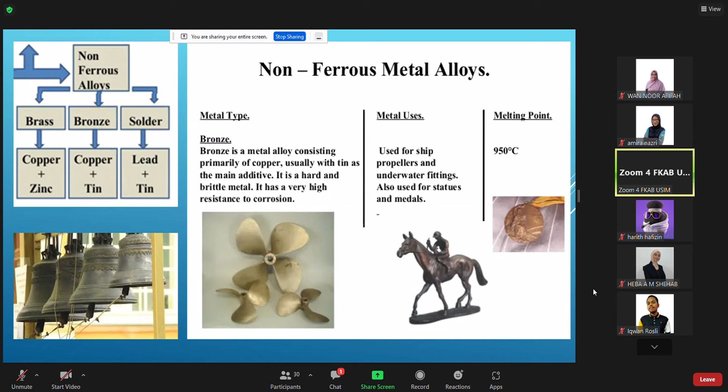Underwater fittings, anything that is in the water, also used for statues, medals, and medallions. And the bell here, probably for ceremonial purposes, also made of bronze.

As for building materials, bronze is popularly used in sculptures for its excellent casting qualities. In architecture, it can regularly be found in hardware, doors, entrances, fountains, handrails, column cladding, and textural details such as plates, medallions, and panels. See some examples.

You can use this as a cast like you have on top of your door, but not in our country - this is in UK. But I remember when I went to Bali one day, when we went to this town called Ubud...

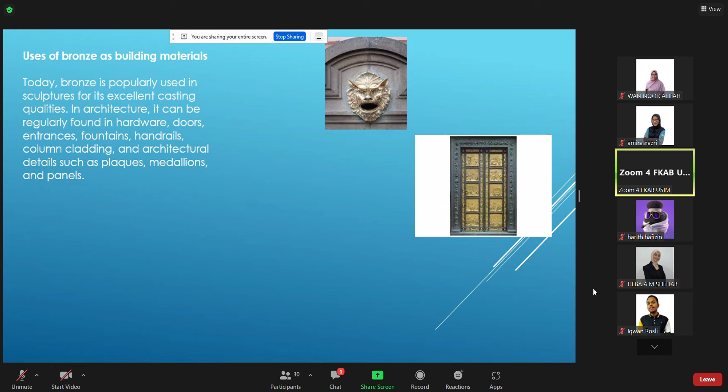So we were staying at one hotel, a very eerie kind of hotel - full of plants creeping on the walls, and quite watery. When the passage is watery, you can see dogs crossing as you walk around, and frogs jumping here and there. When you enter my room, there was this kind of figure on top of the door - that will surprise you. In Bali, the Hindu belief is different from our culture, so it can be quite scary, staying alone. It's not like a row of hotel rooms in a high-rise building, it's like a chalet, joined like semi-D, and you walk through a landscaped passage. So quite eerie in a way, especially at night.

So the door can also be made of brass - of course, an expensive door. Fountain sculpture here, made of brass. The one fountain near the Sultan Abdul Samad is also made of brass, you can check the detail there. This was imported a long time ago. I thought some of it is still there - I'm not very sure whether the fountain is still there near the flag area.

Then railing - yes, brass railing, but not commonly used in Malaysia. The most commonly used materials in Malaysia are stainless steel, aluminium railing, cast iron, wrought iron for railings. And then the facade - this is a facade, something like a wall facade, but I think it's going to be very expensive. It looks nice, something like a copper finish, but it's made of brass.

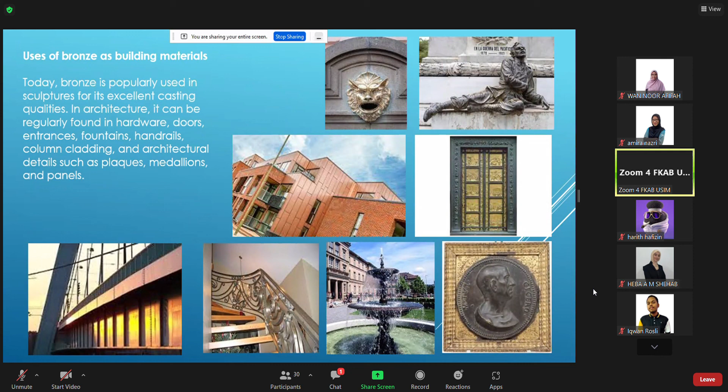Medallion, even coin for that matter. Medal. Okay, lastly, on solder.

Solder is a fusible metal used to join together metal work pieces, having a melting point below that of the workpiece. It's an alloy of lead and tin. Solder is used for electronics, plumbing, jewelry making, repair processes where metal parts cannot be effectively or safely welded.

So look at some of these - they use solder, for example, in the computer chip here, computer board here, to join the parts. So basically, if we're talking about architecture, soldering pipes - you can use lead pipe, copper pipe - these can also be soldered.

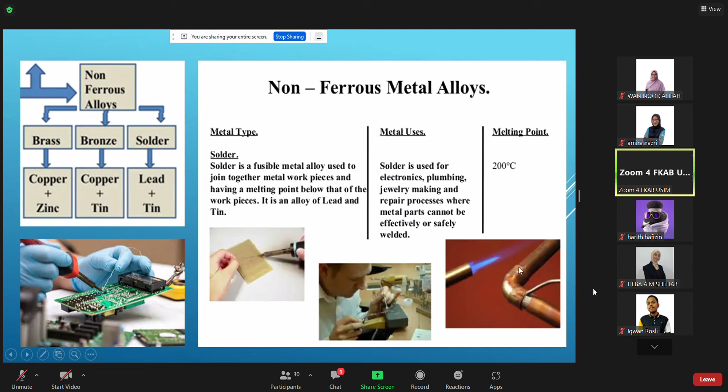So you know about welding, you know about soldering. You've heard about welding, but brazing, maybe you haven't heard about. What are the differences between these three? I just managed to capture some of this.

Soldering is basically what you see in the picture here - a small part, has no structural quality. It is the weakest joint of the three, soldering does not bear weight, generally used to make electrical contacts. Brazing is something in between - stronger than soldering but weaker than welding. It can be used to bear some load, but not too much, by using this metal filament here.

But welding is the strongest of all - the strongest joint that can bear load. The strength of a welded joint can exceed the strength of the base metal. We've been learning about this jointing technique - welding is how the metal members are welded together. As mentioned, the strength of the welded joint is even stronger than the base metal, than the girder itself. For example, jointing the girder of the beam and the column beam, a universal panel - when you complete the jointing, the weld is even stronger than the girder itself. Yeah, that's what they mean here.

So in architecture, what do you have? I try to bring something that has to do with a decorative feature where soldering is used in architecture - the effect of stained glass, for instance. Stained glass is made by soldering the glass together, which is why stained glass is very expensive.

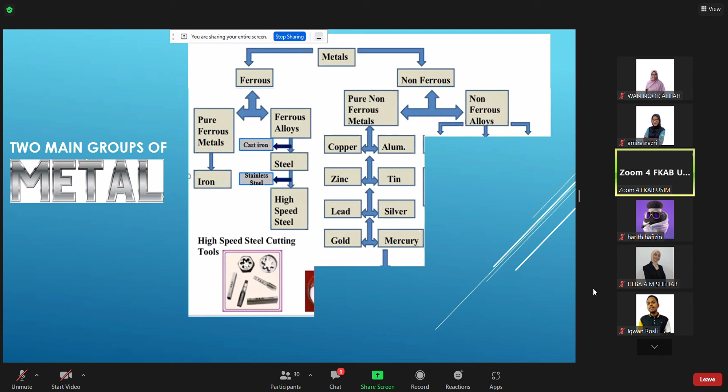The other one, non-ferrous, basically comprises pure metal without any alloy. Of course, pure means they don't add material but extract some out to make it pure - copper, aluminum, zinc, tin, and so on. Then there's mercury, the only liquid metal, which I won't mention much here because it's not so much used in building.

Then lastly is non-ferrous alloy. Remember, alloy is a mixture of two materials - that's alloy. We say alloy mixes two, three, or maybe more materials, depending on what kind of property you want to create for that material.

So as I mentioned, they have steel grading also - there are about 3,500 types of steel, depending on the combination of carbon content and other material added as an alloy. Non-ferrous alloy basically comprises three main ones. There's a lot, but I'll choose these main three: brass, bronze, and solder, which have a relationship to architectural building and construction purposes.

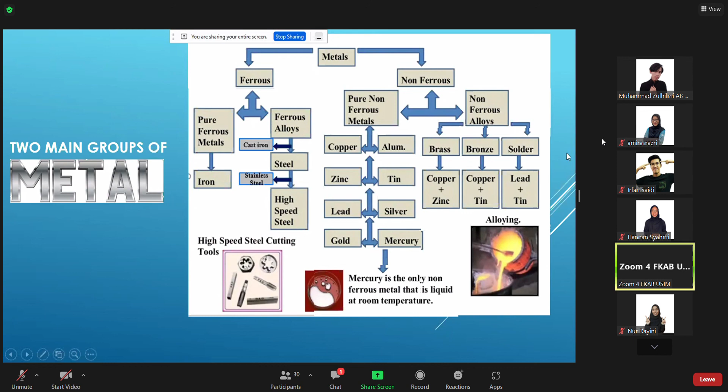Can you hear me well now? Not really, hard to hear. Let me try stopping sharing so you can share in the chat instead. Okay, stop sharing, you can share there. Can you hear me now? Just a minute, okay.

I wanted to ask about buildings that use metal, since metals conduct heat.

You can't hear me? Sorry, the voice is distorted a bit and echoing. I switched to my phone now, how is it? There, this is clear now.

I was asking about buildings that use metal. Metal conducts heat, so for a building using metal framing, I wonder if I touch it, wouldn't it be hot from the sun?

You see the metal, but it's not just metal skin like we imagine. There are a lot of layers in the wall to protect against heat gain and contain the heat absorbed inside. There are composite layers inside: insulation, waterproofing. That depends on the nature and climate of that place. So it's not just a simple skin; the skin is just an add-on kind of thing.